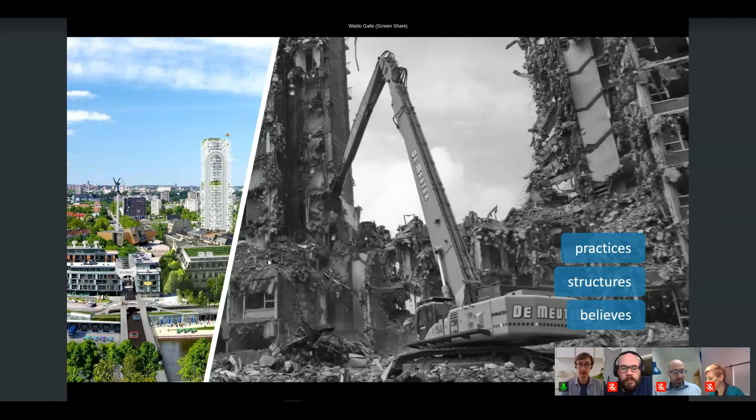Exactly, therefore, in search of those enduring changes, there is the Flemish Living Lab on circular construction. This lab is a 3.5-year project of research and real-life experiments initiated by the regional governmental transition hub Circular Flanders.

The Living Lab on circular construction, or in Dutch proeftuin circulair bouwen, is one of the youngest policy initiatives of Circular Flanders, and its ultimate goal is to develop, based on those experiments and on systemic research behind the scenes, a policy- and practice-oriented way to accelerate eventually the transition.

The Compass Group is really the driving force, as it determines which research issues should be addressed and which experiments must be carried out to further accelerate the transition to a circular economy in construction.

The group is composed of 16 forerunners, ambassadors, and out-of-the-box thinkers of the construction sector in Flanders who have expertise or experience and a strong interest in circular building and hold vast knowledge of the sector's everyday practice. It includes contractors, architectural designers, as well as manufacturers, policymakers, and researchers.

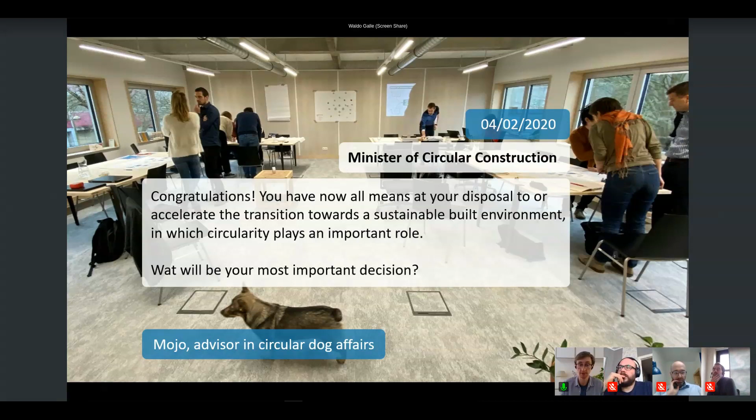But when digging further into why such measures have not been working as expected so far, we discovered many unwanted feedbacks and underlying principles. And when we link all those feedbacks together in loops, it was possible to make some promising change measures explicit. The results are 15 potential actions that were co-identified as a means to break into the current system of construction.

And during the last and fourth workshop, these leverages have been mapped and clustered by the members as a kind of validation according to their estimated impact and difficulty to implement. By doing so, it was possible to set priorities.

For example, some actions could be easily met, like making lifecycle costing mandatory in public procurements. Other actions are more demanding, such as creating alternative financing for circular building solutions with added value for all stakeholders.

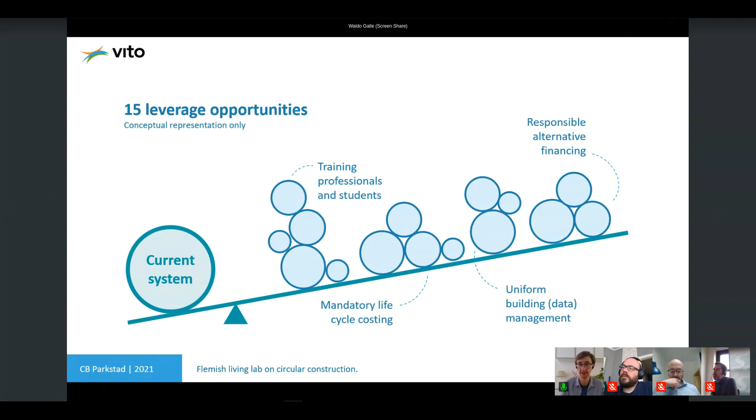Yet the co-identified opportunities are just a stepping stone to really tangible field-based experiments in the Living Lab, who must eventually demonstrate how barriers can be overcome and material loops will be closed.

For this step and for this purpose, Circular Flanders and OVAM, together with the Proeftuin Living Lab, launched a call in the fall of last year, a targeted call for experiments with a total budget of 2.8 million euros. These grants of up to 80% and 100,000 euros per experiment have been awarded by the end of that year to 29 of the 75 partnerships of local authorities, enterprises, and research institutes that together submitted their ideas for experiments.

And in conclusion, to bring together forerunners, ambassadors, and out-of-the-box thinkers of the construction sector with expertise on circular building and insight in the sector's everyday practice, our Compass group co-creating together, it was possible to co-create systemic hurdles, necessary changes, and leverage actions.

So it's a kind of demonstration how a well-guided Compass group allows bringing into practice participatory system modeling, and by consequently translating the outcomes and their insights into the requirements for a targeted call for experiments, it is further demonstrated that the created knowledge has been really actionable for the policymakers of Circular Flanders and OVAM, who triggered 75 partnerships to submit their ideas.

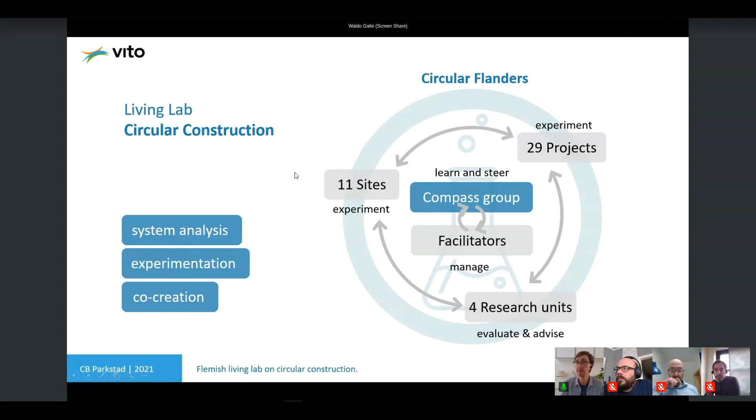The story is far from over, but my time is out. I can only thank once again all the members of the Compass Group and our research partners, and I'm looking forward to your questions and remarks.

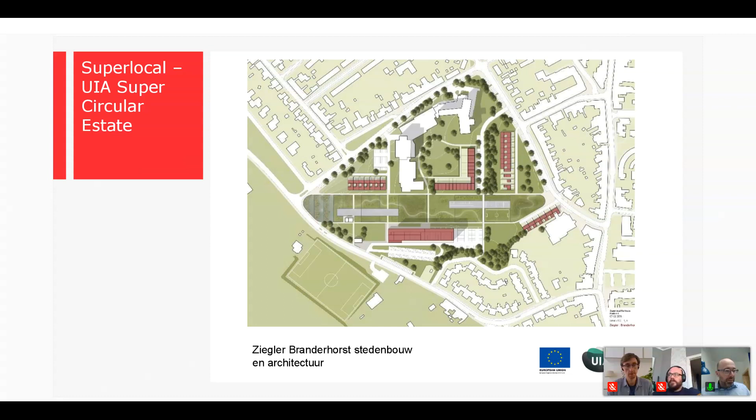So since it was not possible to get in the tenants, they also have been interviewed beforehand by several architectural companies to get a feeling of how this community looked at its environment, at its qualities, etc.

Over the past project, we have had the opportunity to also monitor with other parties getting involved in the project. We're talking about professionals, all the experts that have been involved: civil servants, housing corporation professionals, building professionals, design professionals on the one hand. Secondly, as was also explained in the plenary session just before this one, the neighborhood, people that live in the surrounding area. And thirdly, also people that have been very much interested in visiting the process and the project to see what's going on, to learn about circular building, such as students, policymakers, other experts, etc. So these were 3 groups that we saw opportunities with to learn about societal acceptance of circular building solutions.

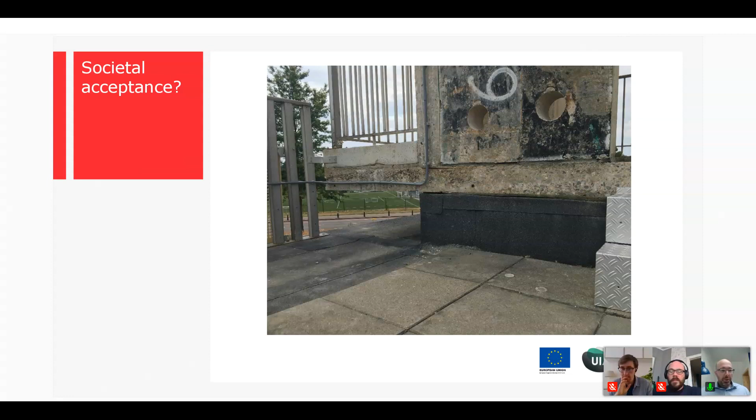So to repeat again, we did this with 3 kinds of parties: the involved experts, the neighbors, and a wider audience. I would like to look at the perspective of neighbors primarily now. Due to the limited time, I can only address one of the groups in depth, so I chose the neighbors because I have the most questions and discussion points there that I would also like to hear your opinion about.

We did some further experimentation also with experts during the monitoring. With a wider audience it became a bit more difficult also because of the COVID situation, so some experiments couldn't be implemented. But we did something with the neighbors, and I will go into that now.

As was also explained in the plenary session, there was a steering committee, a soundboard as we call it in the Netherlands, of local residents and homeowners that live in the neighborhood that we first approached to get an idea of what's going on in the neighborhood. Based on discussions with them, we moved on to a more qualitative kind of survey among neighbors.

We did very informal interviews with surrounding inhabitants during a neighborhood event when all people come together at the site, and we could discuss how they perceive the project at that moment. The intention was to develop it into a quantitative survey after that, based on those responses, which didn't work completely well, but I will try to explain a bit about it.

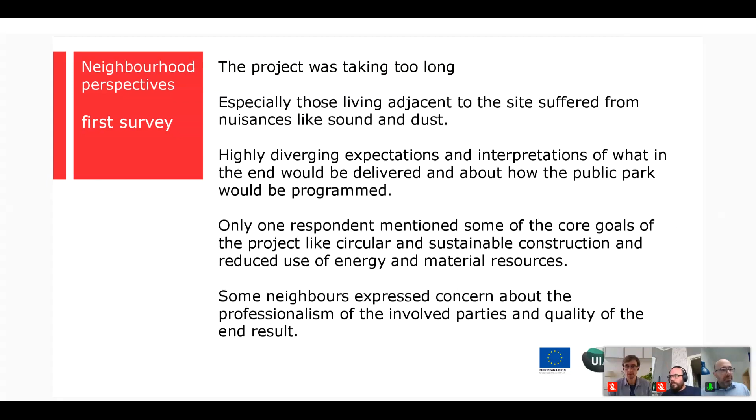We tried to further interrogate that with a quantitative survey. We implemented an online research which unfortunately did not receive enough response. We tried to test if these behaviors, understanding and knowledge of the project, importance given to it, and also the confidence in the involved parties were representative.

I only found, based on the response, confirmation of the fact that there was limited interest in the core values and more interest in the use of public space, of how that would be filled in, and a little bit less confirmation of confidence in the involved parties.

I think I'm almost out of time, Wendy. Yeah, I give you a minute.

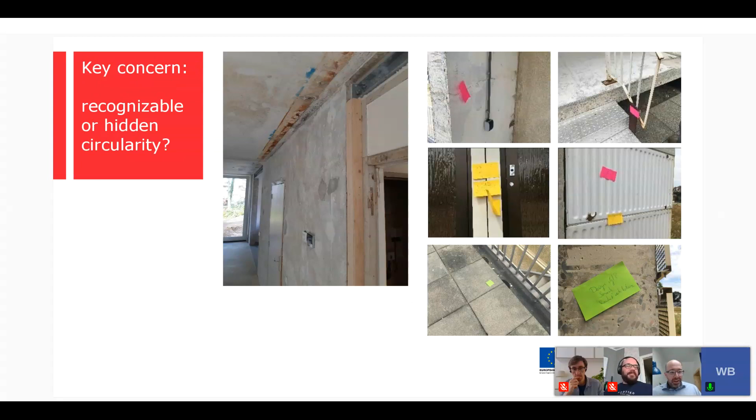I will try to bring it back and tie it into the overarching observation, which I think is the core - maybe this is a big leap, but we feel that centrally is the question of the narrative of circular building: whether it should be very visible or not, whether it should be hidden, and proving that you can reach the same quality of circular building as with regular building, or expressing it very clearly, stating like this is circular building. We found many tensions between professional experts, visitors and inhabitants.

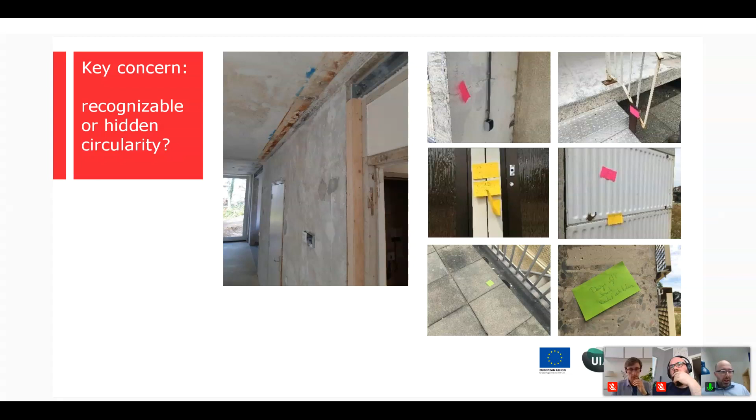Well, I think then due to the limit I have to stop. Yeah, yeah, thank you, I will leave it at that then. Maybe have you a final conclusion?

Okay, well the final conclusion to me was that I think we're trying to look at a higher level of participation to bridge these gaps, or to bridge these different perspectives between inhabitants and experts, and also to use that as a vehicle for implementing this research, as we found many issues in getting people interested in joining this qualitative and quantitative research. So I think from this co-creative or co-design process or participative processes, you could get a better level of response. This is what we'd like to explore in future projects.

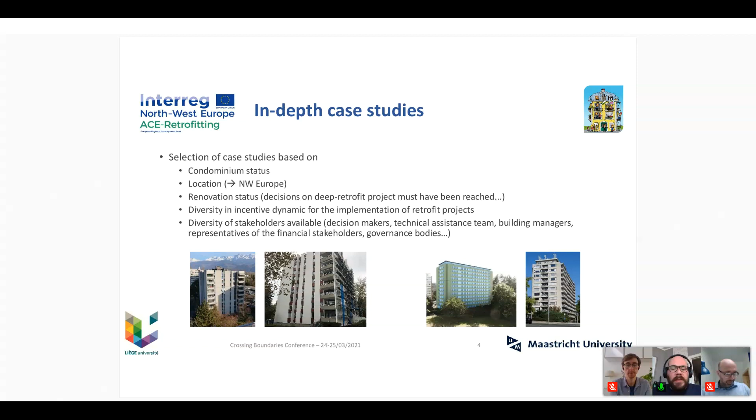Here you can see on the left the Manival condominium near Grenoble, and on the right the Expo 1 condominium in Brussels. Details on both can be found in the paper.

In order to understand the interrelations of personal and external factors, we used the social ecological model, which is based on ecological systems theory and is designed to understand the dynamic interactions between individual and environmental factors that determine behavior.

We found 5 scales that we identified inside condominiums, with at the core the individual level, which includes the homeowners and the other dwellers of the condominiums.

Then we have the interpersonal level, represented by the community of co-owners with shared interests in the building. Then we have the organizational level, which can be seen in different bodies, for instance, the property managers and the condominium board, or even the architects.

Then we have the community level, which is represented by officials and services of the municipality, and the societal level with higher administrative levels of society, such as legislators.

So we managed to organize interviews with representatives of all those levels for both case studies, and we organized focus groups with those representatives.

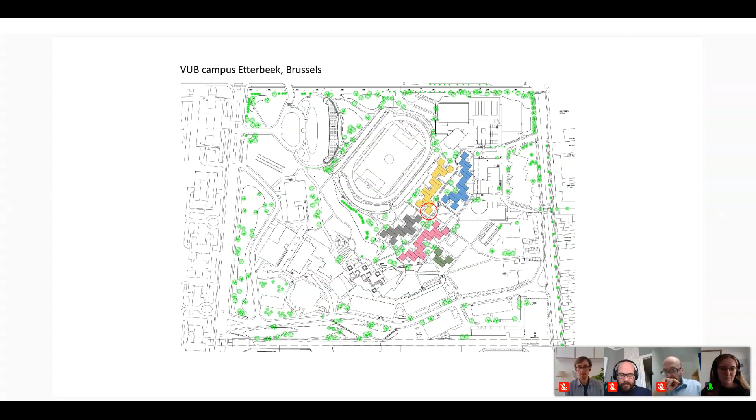The Circular Retrofit Lab, or CRL, was one of the case studies of the Buildings As Material Banks (BAMB) project of Horizon 2020 Europe. It concerned the refurbishment of 8 student houses at the VUB campus, shown here as the yellow square and red circle. In total there are about 350 student houses on the campus.

The main aim of this CRL project was to integrate circularity principles, such as designing with reversible connections, that could be implemented in a retrofitting project.

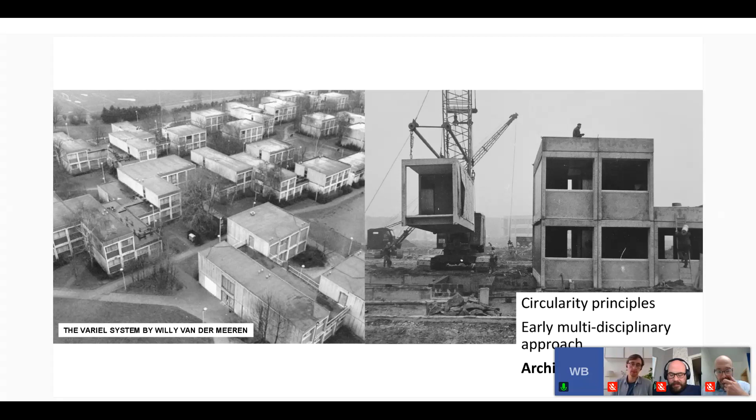A second important aspect of this project was its architectural value. The student houses were designed by the famous architect Willy van der Meeren, built out of his famous Variel system, which are the concrete modules that serve as structure here.

Third, this project's solutions were not only developed by the architect, but with a whole team of multiple partners from the beginning of the design process — what we call an early multidisciplinary approach. This brought many advantages, but also some disadvantages, which I will talk about later.

As this project finished in 2019, we can now reflect on it and learn from it, and maybe upscale it to the other 350 student houses on campus, and even to other refurbishment projects in Brussels, Flanders, and beyond.

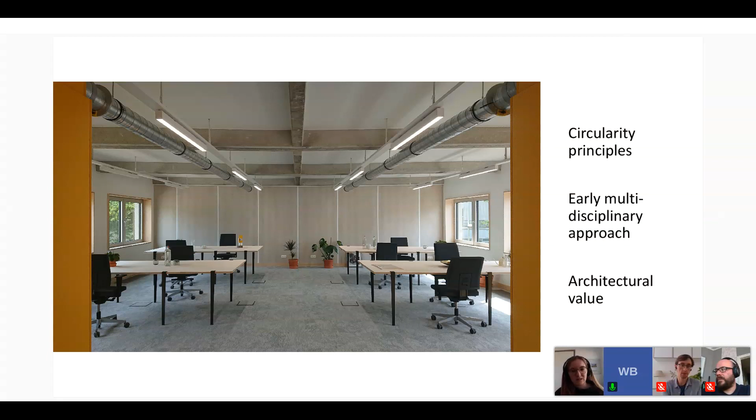So the question is how these three factors I've named have influenced the design choices. To limit the scope, I will only focus on the facade design of the CRL.

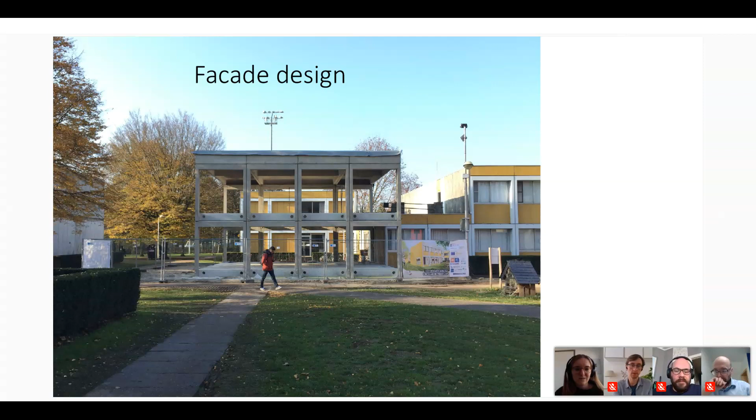The structure of the facade is the concrete structure that is reused, shown earlier, here stripped. Then some panels are mounted on it. These facade panels are modular, prefabricated, and also demountable.

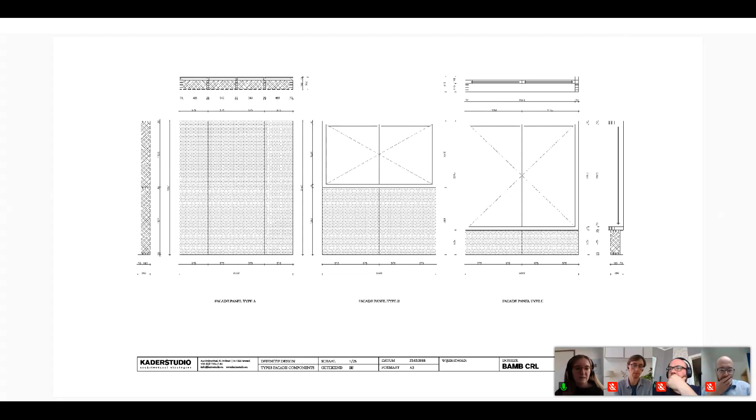They differ here in window presence and window size, but there are more facade panel types as well, though I will focus on these now.

This is how they were delivered and installed on site. They consist of a wooden frame with aluminium window frames or insulation encapsulated with two wooden boards at each side. When installed, they are covered with a yellow covering as facade cladding, which isn't in these pictures but will be shown later.

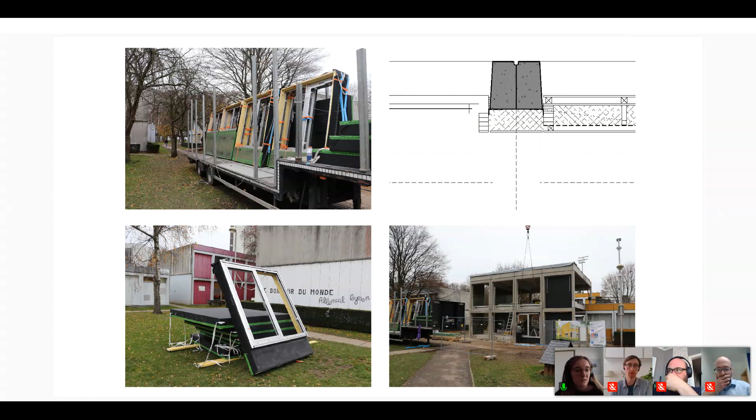Moving on to the design decisions: even when focusing only on the facade, there were 10 unusual design decisions identified — decisions not common in other building projects. I will show two of them; the rest are in the full paper.

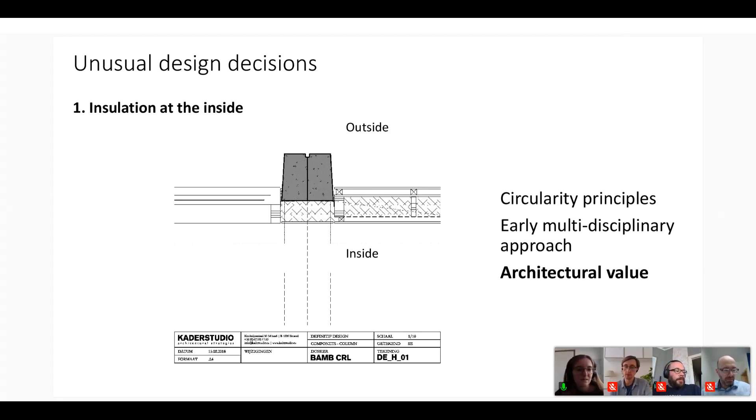The first is insulation on the inside of the structure. The architectural value of the concrete structure meant the facade panels were installed inside the concrete structure rather than outside. This demanded special attention to fulfill the energy requirements, and even though not all thermal bridges could be avoided, the continuity of the insulation was maximized to still optimize building performance.

Here you can see what I mean by the architectural value: the CRL on the left with the facade cladding, and on the right the original student houses.

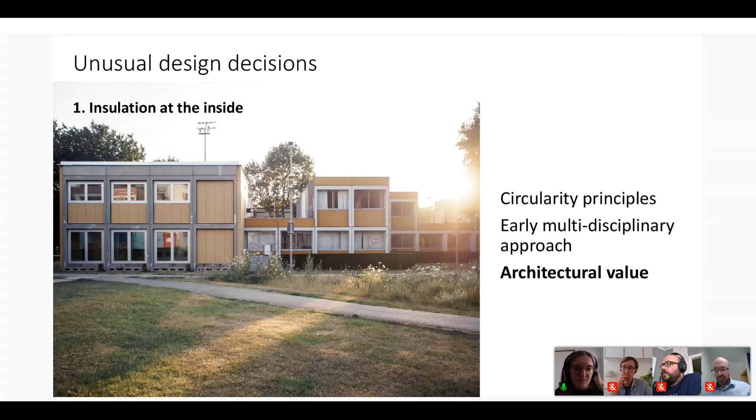So in a common building project, the structure would have been capsuled to avoid thermal bridges. A second uncommon design choice was to make the joints easily accessible. This is a consequence of the circularity principles, to simplify maintenance, installation, and demounting, without damaging the nearby elements.

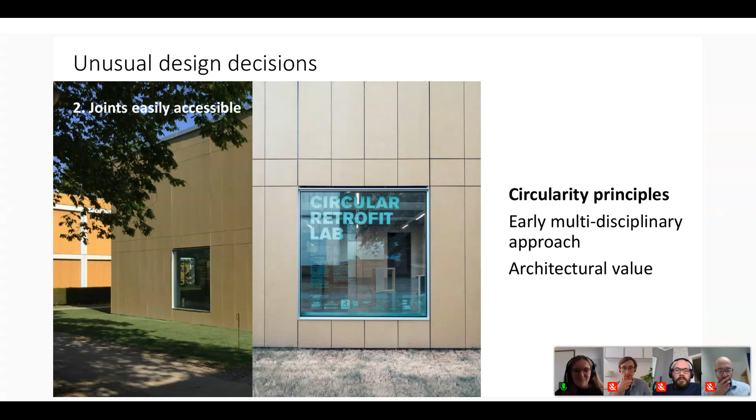This has as a consequence that the connections are still visible. As you can see here on the facade cladding, the bolts are still visible. In other, or mostly, the facade elements would have been glued and the connections wouldn't be visible. That's also what Marijn mentioned in his presentation, whether circularity is visible or hidden.

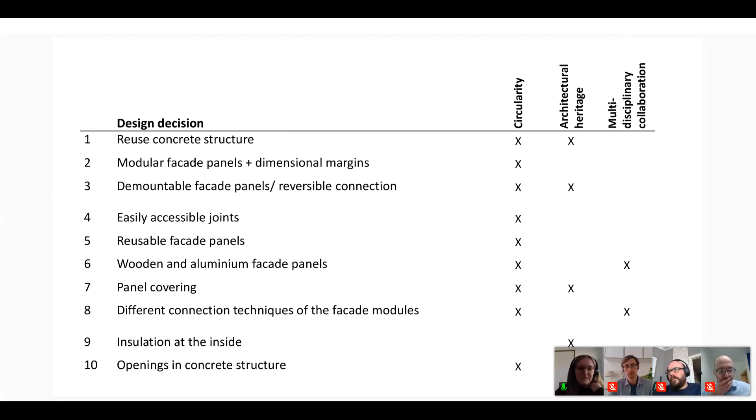I will skip this one. So in total, there are about 10 of those design decisions, and they can all be related to the 3 aspects here. Most are related to circularity because it was the main aim of the project. 4 of them are related to architectural value, and only 2 to the multidisciplinary approach.

So in the beginning of the process, there were mainly positive experiences, and the first ones are related to the fact that it's considered positive to establish a valuable network in circular buildings. It was really seen as an opportunity to learn from each other, to bring all the knowledge together, and to start from there on circularity, to experiment together.

But towards the end of the process, there was, of course, the negative experience linked to time pressure. It was delivered too fast. There was not enough time to validate and investigate. And this can be the result of two causes.

This should still be further investigated. But for example, it can be the result of the technical complexity that arises from integrating circularity principles, because they're added to a long list of design principles that should be implemented anyway, like acoustics, thermal comfort, fire prevention, and so on.